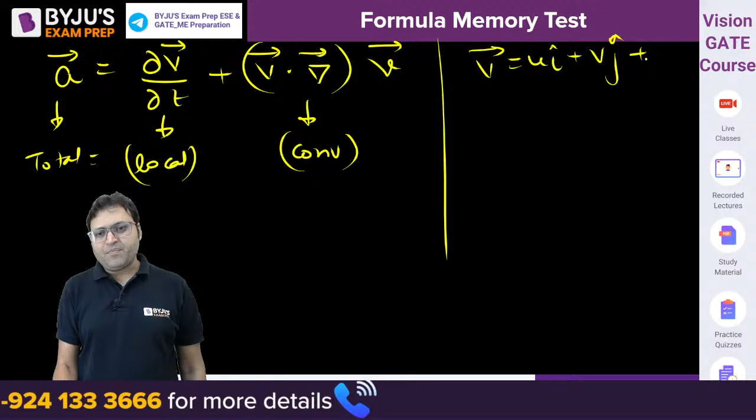What is V dot del? V dot del is not equal to del dot V. V dot del is u into del by del x plus v into del by del y plus w into del by del z. So this is the expression for acceleration. And del dot V will be del u by del x plus del v by del y plus del w by del z. There is a difference between del dot V and V dot del.

The next one. The next question, everyone, answer the next question.

For flow to be possible, velocity potential function satisfies Laplace equation. What is the Laplace equation? Del square phi is equal to 0. And for irrotational flow, the stream function satisfies the Laplace equation. So del square psi is equal to 0. Del square is equal to del dot del, that is del square by del x square plus del square by del y square plus del square by del z square. So both must be equal to 0.

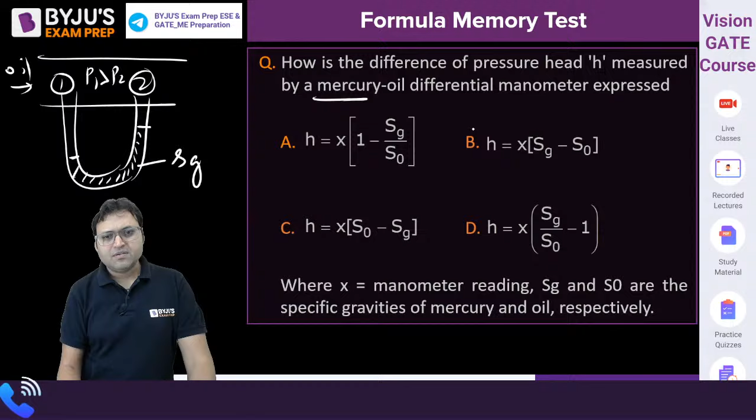What is the difference of pressure head? So, if we attach a manometer, if P1 is greater than P2, then the manometric deflection will be like this. This is the specific gravity of the manometric fluid, and the manometric fluid is mercury, and the flowing fluid is oil. So the pressure head is P1 minus P2 by rho g. How to denote P1 minus P2 by rho g? What will we get? We will get H is equal to X into Sg by S

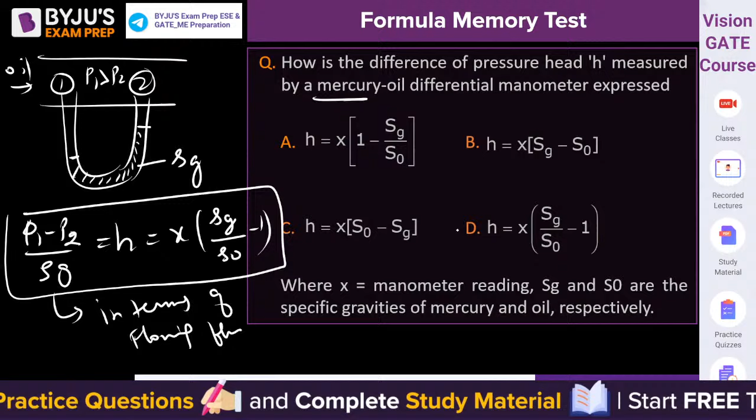of oil minus 1. That is the pressure head difference in terms of oil, in terms of the flowing fluid head. X is the manometric reading, Sg and So are the specific gravities of mercury and oil. What is the answer? D. D is the answer. What about the next?

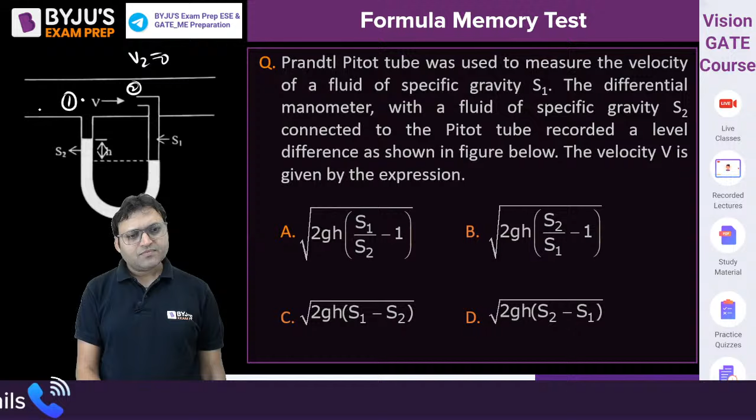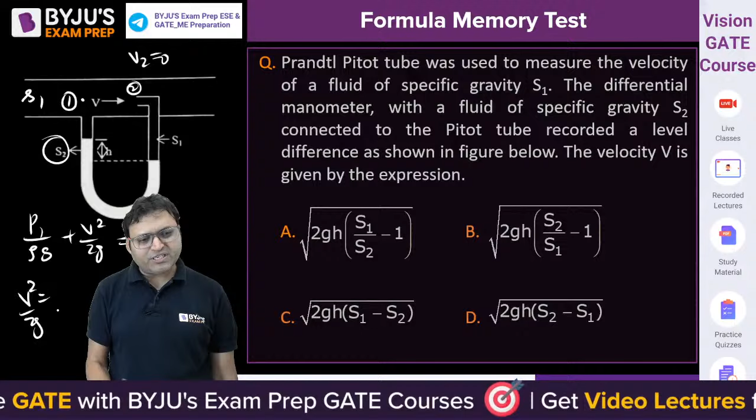The next one. Prandtl's pitot tube was used to measure the velocity of a fluid of specific gravity S1. Here is point 1, here is point 2. V2 is equal to 0, isn't it? And the fluid is S1 and the manometric fluid is S2. So if we apply the Bernoulli equation, P1 by rho g plus V square by 2g is equal to P2 by rho g. So V square by 2g is equal to P2 minus P1 by rho g.

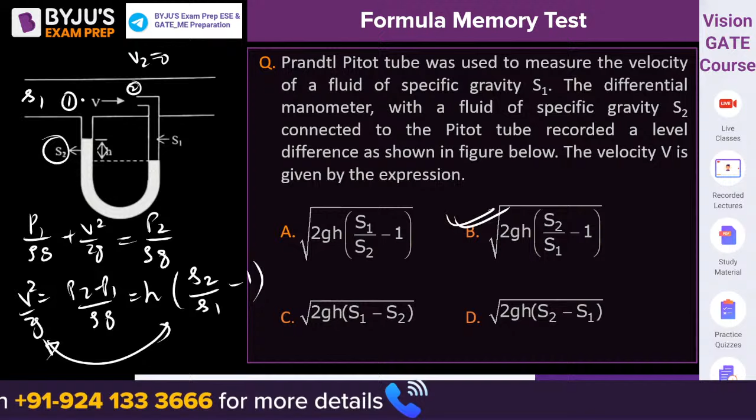And what is P2 minus P1 by rho g? If the manometric fluid deflection is H, it is H into S2 by S1 minus 1. So we can find out V from under root 2g times that. From here we can find out the velocity V. What is the correct answer? It will not be A, it will be B. B is the right answer. Right? B will be the correct answer.

Now let us move to the real flow. What we discussed so far are the questions from kinematics, as well as the questions from the Bernoulli equation. Now let us move to the next one. The transition from laminar to turbulent flow does not depend on... look, it is the Reynolds number, rho Vd by mu. It depends on density, yes. It depends on the diameter, and it depends on the velocity. It does not depend on the length. It is not a function of the length of the pipe.

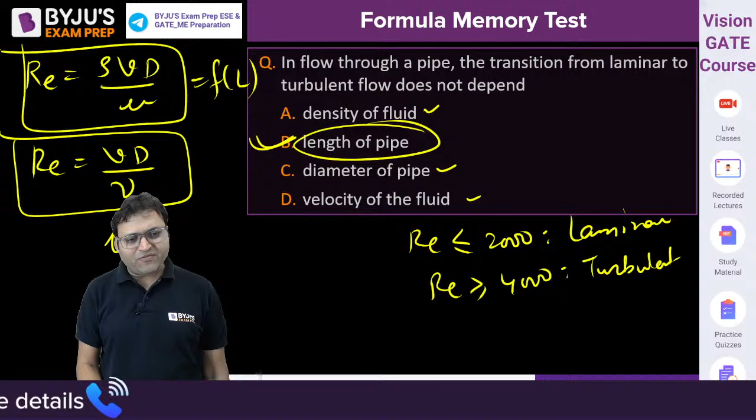For Reynolds number less than 2000, the flow in the pipe is laminar. For Reynolds number greater than 4000, the flow will become turbulent. It does not depend on the length. So Reynolds number can also be written as V into D by kinematic viscosity, where kinematic viscosity is equal to dynamic viscosity per unit density. As we discussed yesterday, the unit of kinematic viscosity is meter square per second.

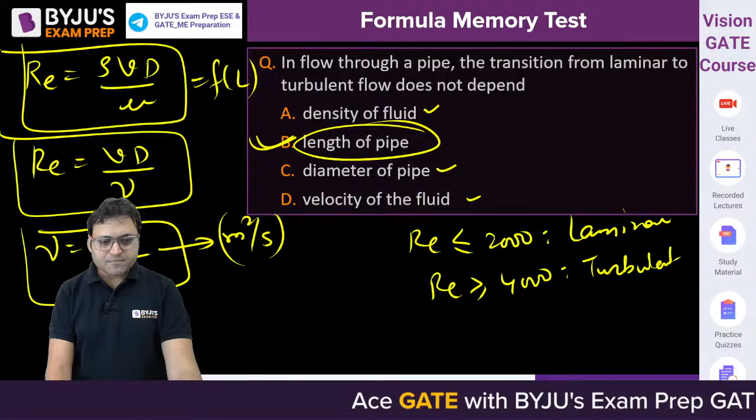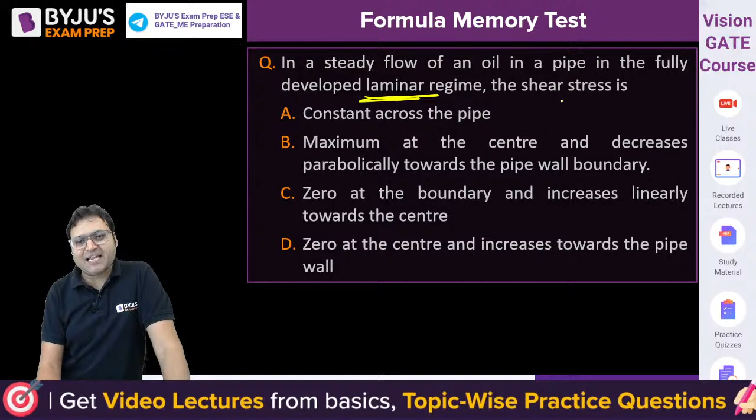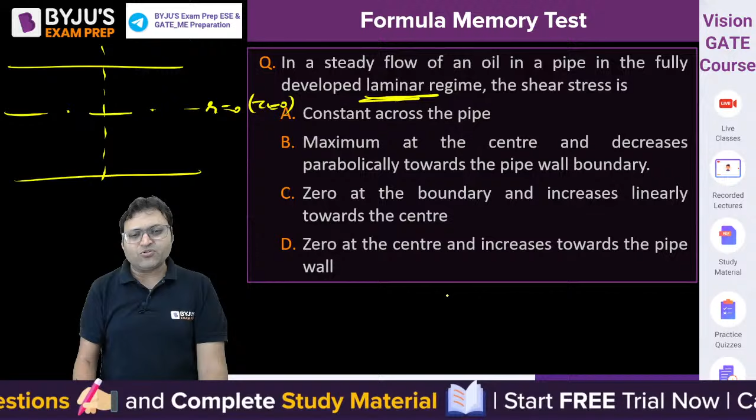In a steady flow of an oil in a pipe in the fully developed laminar regime, how does the shear stress vary at any section? At r is equal to 0, shear stress will be 0, because tau is given by minus dp by dx into r by 2, or 2 mu U maximum r by capital R square. So at r is equal to 0, tau is equal to 0, and the variation of shear stress is like this. This is tau naught at r is equal to capital R. At the wall of the pipe, shear stress is maximum.

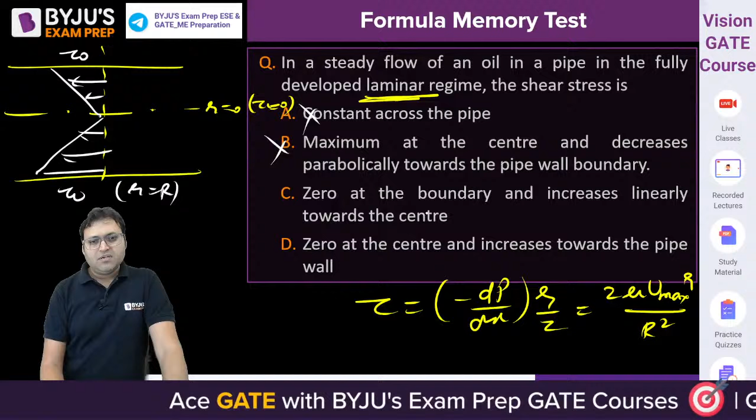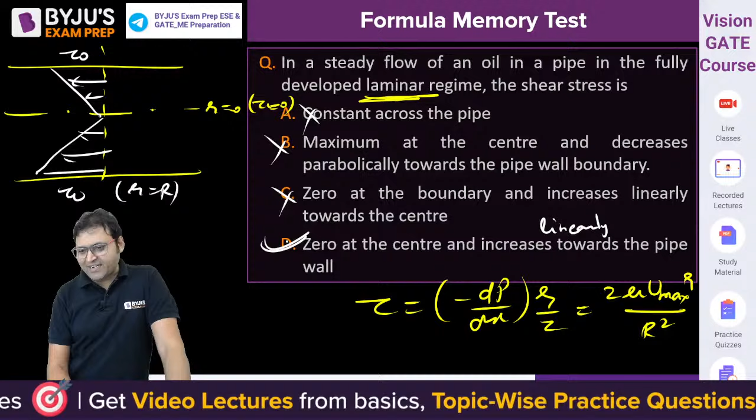Constant across the pipe? No, it is not constant. It is maximum at the center? No, it is 0 at the center. It's 0 at the boundary? No, it is 0 at the center. It is 0 at the center and increases linearly towards the pipe wall. D is the correct answer. Tau is a linear function of r. The variation of shear stress is linear in case of laminar flow through pipe. What about the next one? The next question.

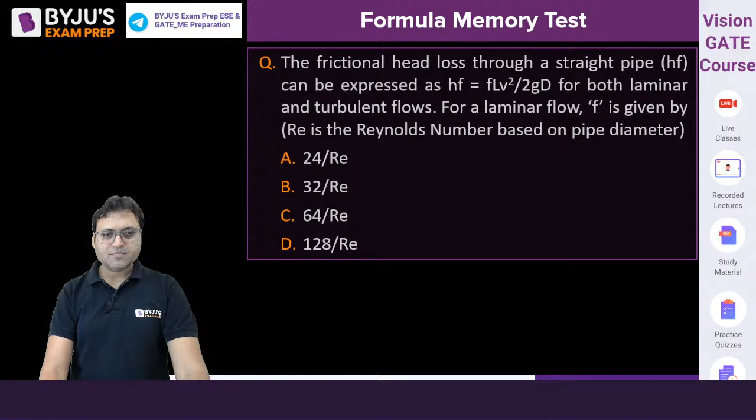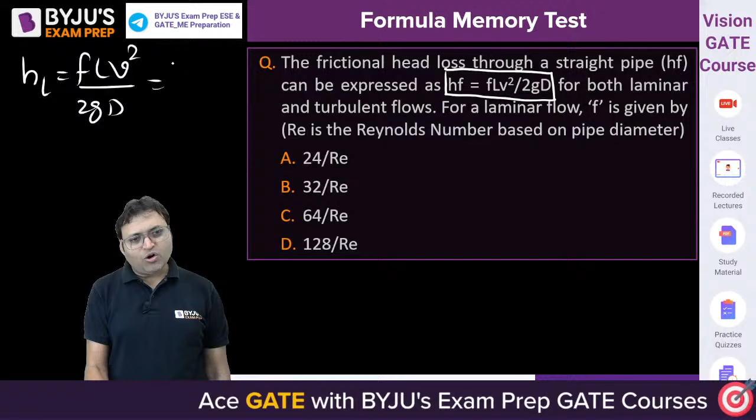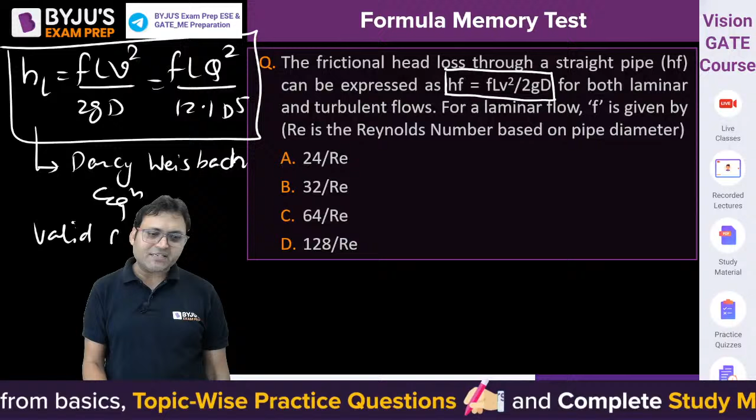The frictional head loss through a straight pipe can be expressed as, this is called the Darcy-Weisbach equation. hL is calculated as fLV square by 2gD, or we can write it as fLQ square upon 12.1 D to the power 5. This is the Darcy-Weisbach equation, which is valid for laminar as well as turbulent flow. Laminar plus turbulent flow.

So, if the flow is laminar, then f is given by 64 by Reynolds number, 64 by Re. Option C. C will be the right answer. Next one.

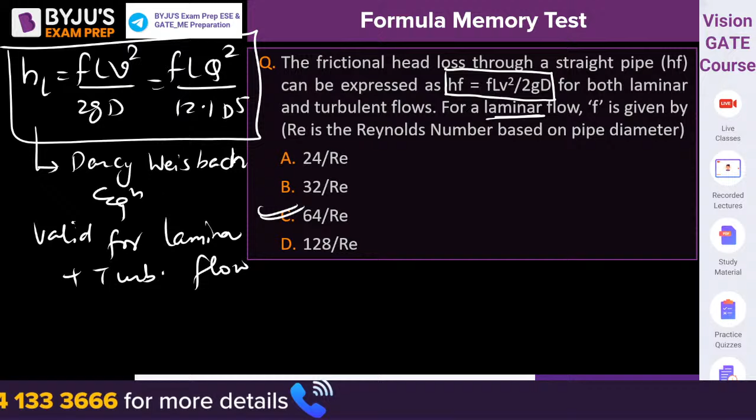Maximum to average velocity in laminar flow through a pipe: U maximum by V average is equal to 2 for laminar flow. And average velocity by maximum velocity will be 1 by 2. Do not commit this mistake. Maximum velocity is twice the average velocity.

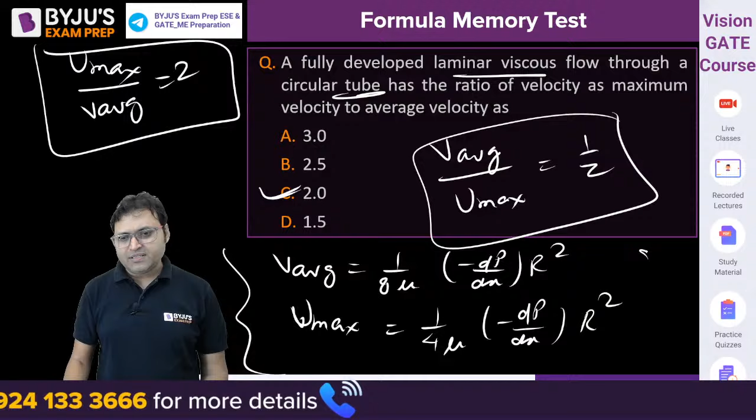Average velocity is 1 by 8 mu into minus dp by dx into R square, and maximum velocity is 1 by 4 mu into minus dp by dx into R square. These are the expressions of average and maximum velocity. C is the correct answer. Now for the parallel plates. For laminar flow between parallel plates separated by a distance h, the head loss varies.

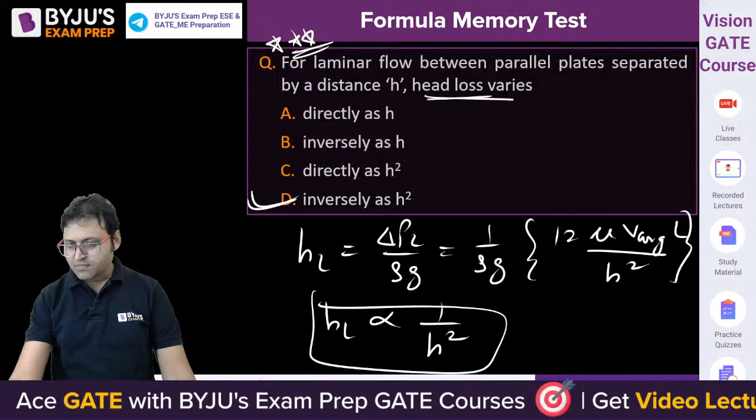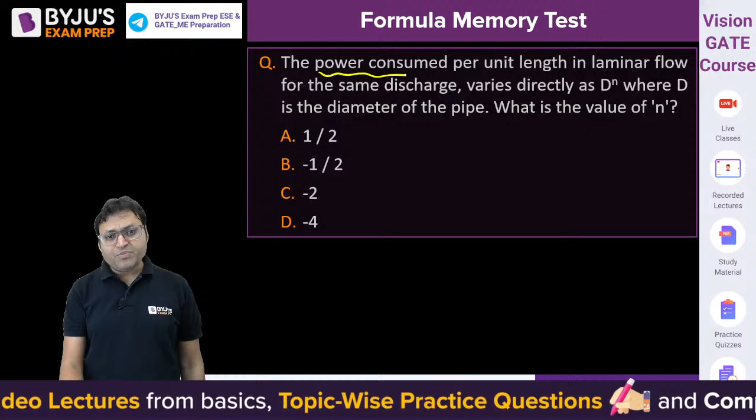Yeah. Next question. The power consumed means power loss. That is given by rho into Q into g into HL. And what is HL? HL can be written as delta PL by rho g. So the power loss is equal to Q into delta PL. And what is delta PL? The flow is laminar, so we can use the Hagen-Poiseuille equation.

So power loss is equal to Q into 32 mu V average L by D square. For the same discharge, if discharge is constant, then V is inversely proportional to D square. So power loss is proportional to V average by D square, and V average is inversely proportional to D square.

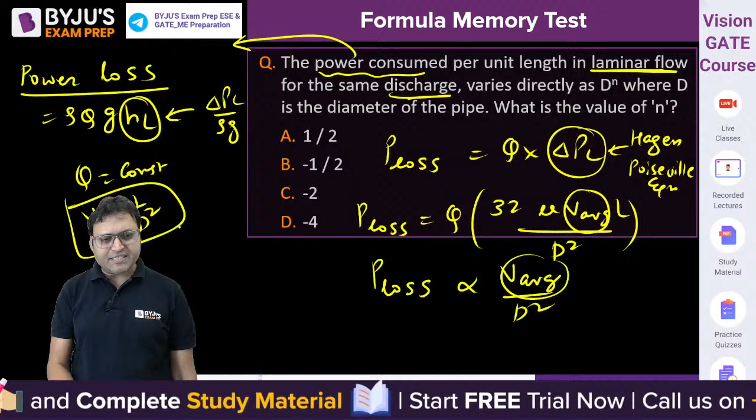So power loss is inversely proportional to D to the power 4. So it is proportional to D to the power minus 4. D is the correct answer.

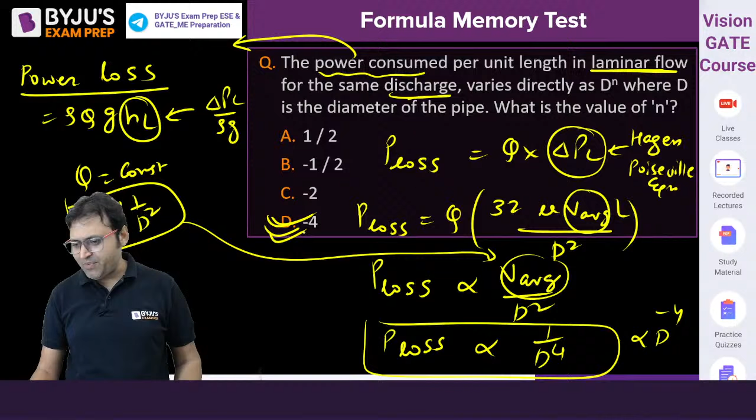So here power loss is proportional to f upon D to the power 5. If you put the value of f here, then power loss will be proportional to D upon D to the power 5. You will get the same result. Power loss is proportional to D to the power minus 4. Either use the Hagen-Poiseuille equation or the Darcy-Weisbach equation. That is your choice. The answer will be option D only. Very, very important question. Either numerical or theoretical question is asked from this.

The next one, from turbulent flow. In a fully developed turbulent flow through a rough pipe, how is the friction factor related to relative roughness and Reynolds number? For a smooth pipe, when the ratio of k by delta dash is less than 0.25, f is given by 0.316 upon Re to the power 1 by 4. It is a function of Reynolds number only, for the smooth pipe.

And if the pipe is rough, 1 by root f is equal to 2 log R by k plus 1.74. That is when k by delta dash is greater than 6. So f is a function of k by D, that is relative roughness. And if the pipe is in transition, then f is a function of Reynolds number as well as k by D ratio.

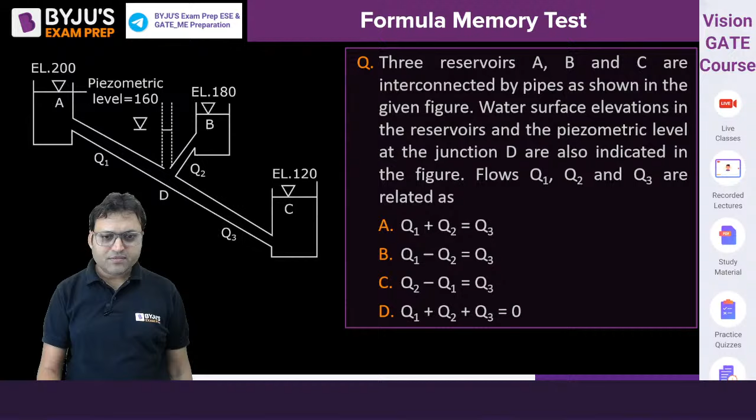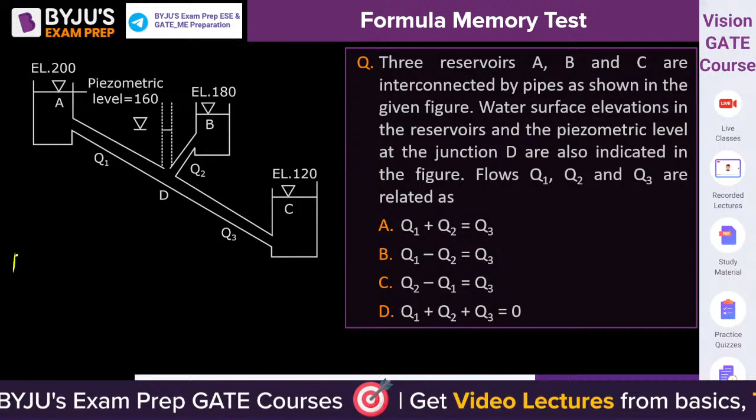What you need to understand here is flow always takes place in the direction of decreasing total energy of the fluid. At A, the energy level is 200. So HA is given as 200.

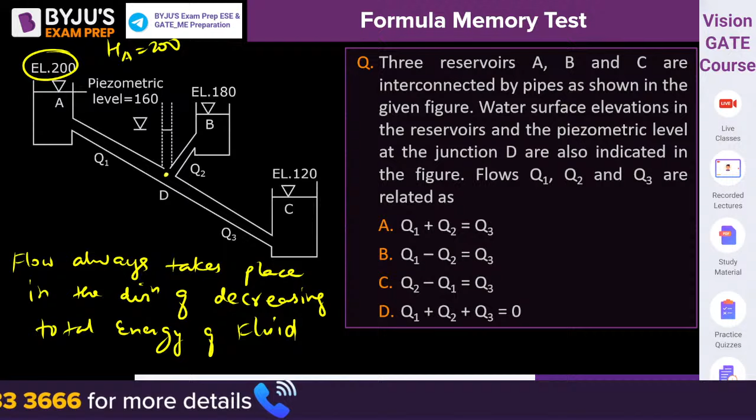At the junction D, the velocity is equal to 0, so the piezometric level, that is HD, is equal to 160. At B, HB is equal to 180, and at C it is equal to 120. So we can find out the direction of the flow.

D is having the less energy, so the flow is from A to D. And total energy at B is 180, total energy at D is 160. The flow will be from B to D. And D is having more energy than C. Then the flow will be like this. So it will be Q1 plus Q2 is equal to Q3.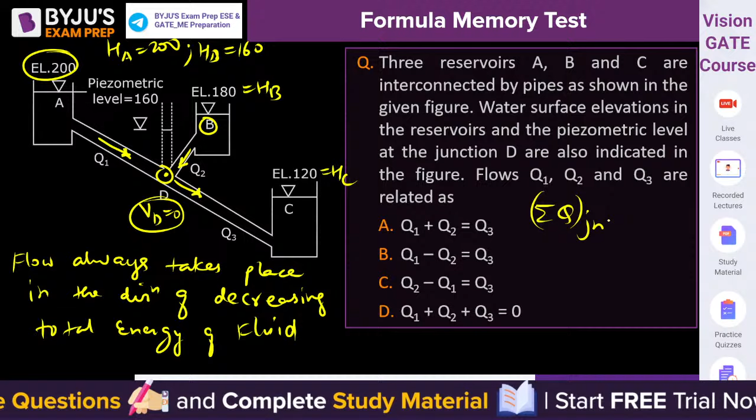Sigma Q at a junction is equal to 0. Or we can say sigma Q in is equal to sigma Q out. So entering will be Q1 plus Q2, leaving will be Q3. So A is the correct answer. Q1 plus Q2 is equal to Q3. The flow always takes place in the direction of decreasing total energy of the fluid, isn't it?

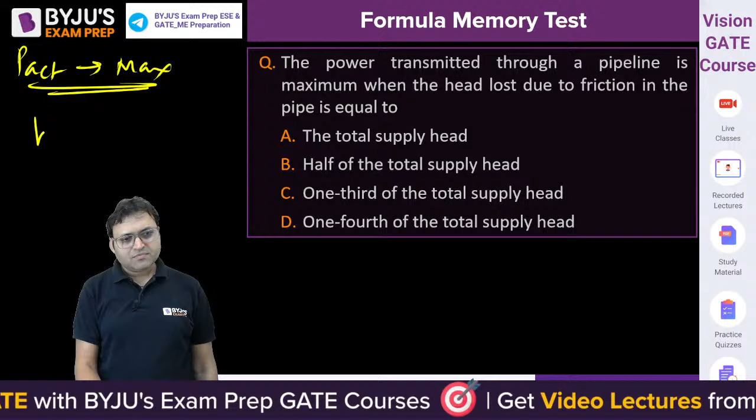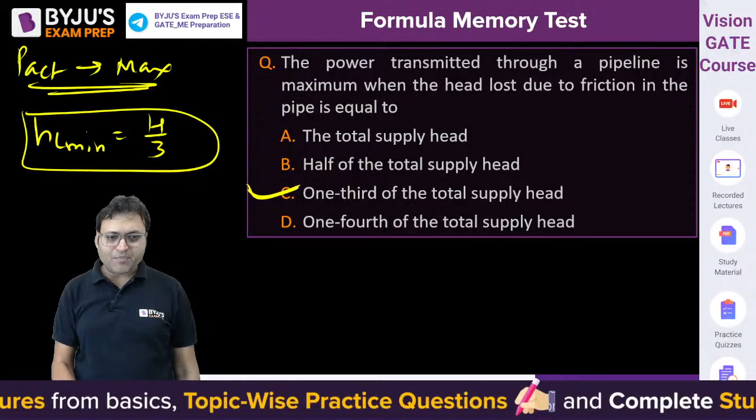And if we want the power to be maximum, P actual to be maximum, what will be the condition? HL should be equal to H by 3. For power transmission to be maximum, the loss should be H by 3. So it should be 1/3 of total supply head, C, and the maximum efficiency will be equal to 2 by 3 or 66.67%. If HL is equal to H by 3, then the efficiency will be maximum, that is 2 by 3 or 66.67.

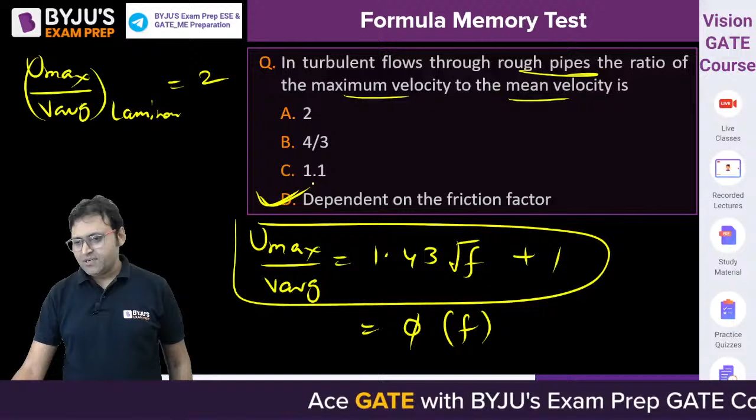Now, in turbulent flow through rough pipe, the ratio of maximum velocity to the mean velocity, U maximum by V average, is 1.43 under root of F plus 1. That is the ratio. It depends on friction factor. The ratio U maximum by V average for laminar flow is equal to 2. But for turbulent flow, it depends on friction factor, D. D will be the answer.

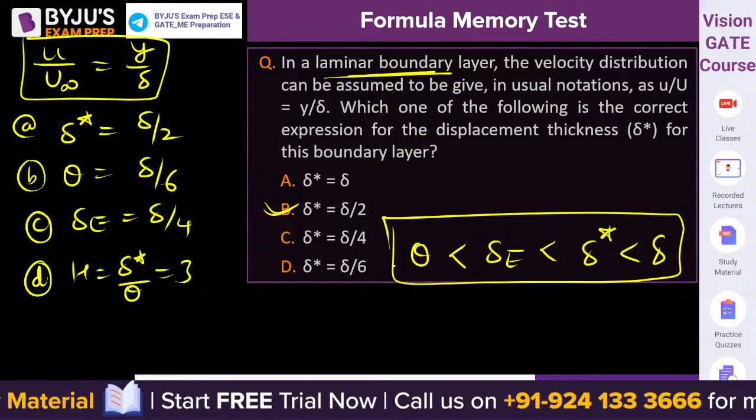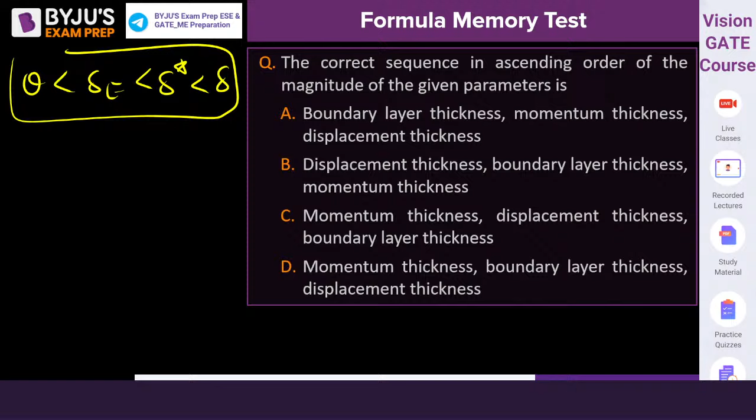Delta star is delta by 2, and if we find out the increasing order, theta is minimum, then delta E, then delta star, then delta. Isn't it? The correct sequence, I told you, theta, then delta E, then delta star, then delta. This is the ascending order of the magnitude. Displacement thickness, momentum thickness, energy thickness is not given.

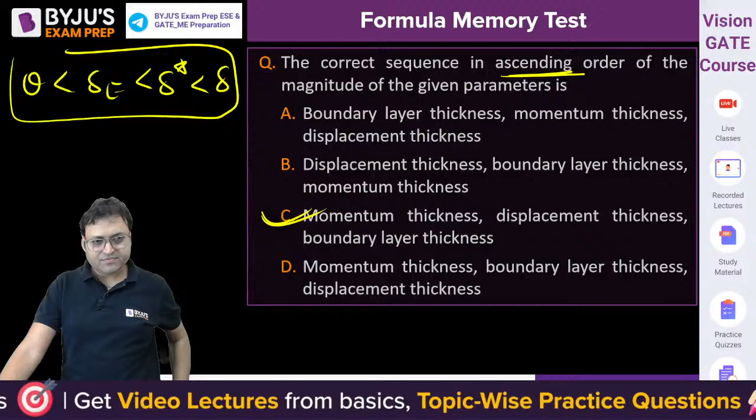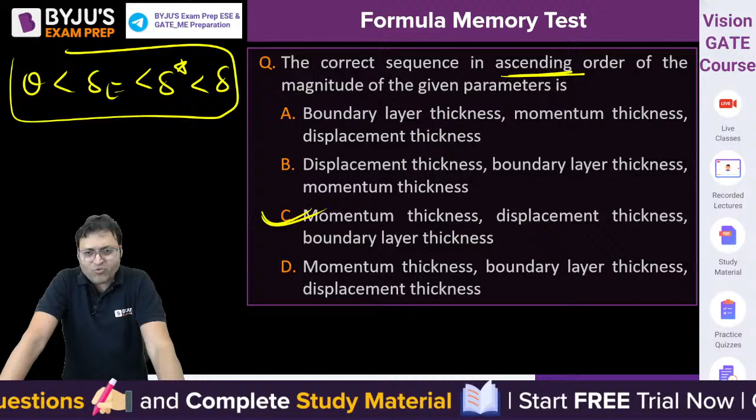What is the correct answer for this one? Isn't it option C? In the ascending order, increasing order, isn't it C? Momentum thickness is minimum, then energy thickness, then displacement thickness, and then boundary layer thickness. C is the answer. C होगा ना, ascending order.

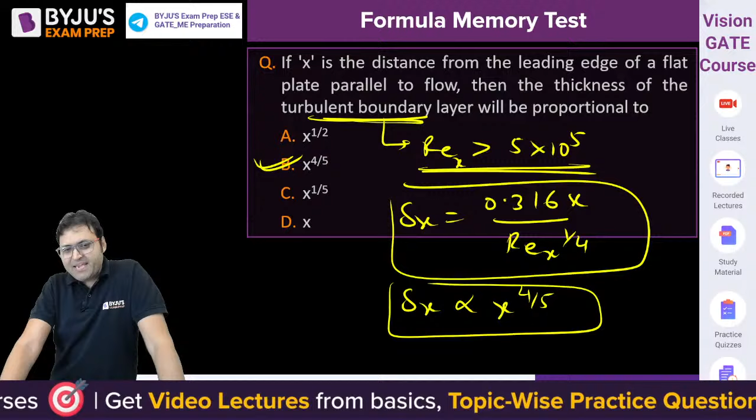It is for turbulent boundary layer. Do you know the relation? For turbulent boundary layer, when the Reynolds number is greater than 5 into 10 to the power 5, delta x is equal to 0.316 x upon Re x to the power 1 by 4. That is the expression. So delta x is directly proportional to x to the power 4 by 5. टर्बुलेंट की बात हो रही है मोहित, x to the power 4 by 5. B, isn't it? B is the answer.

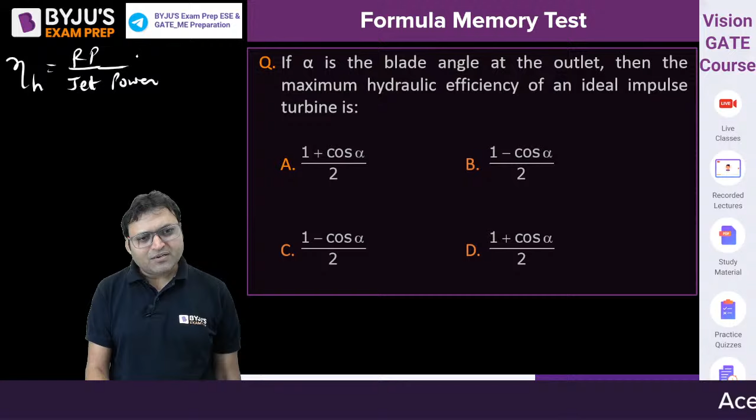And efficiency, what is hydraulic efficiency? That is the ratio of runner power by jet power. So runner power is m dot into u into v1 minus u into 1 plus cos beta 2, or cos alpha, upon half into m dot into v1 square. So the hydraulic efficiency is equal to 2u into v1 minus u into 1 plus cos beta 2 upon v1 square.

If you put u is equal to v1 by 2, maximum hydraulic efficiency will be equal to 1 plus cos beta 2 by 2. It is greater than 50%. Maximum hydraulic efficiency is greater than 50%. 1 plus cos alpha by 2. Alpha is the blade angle at outlet, that we call beta 2. So 1 plus cos alpha by 2. A is the answer.

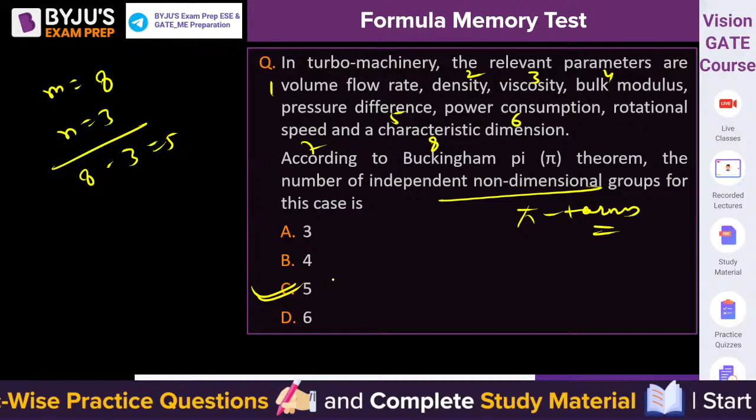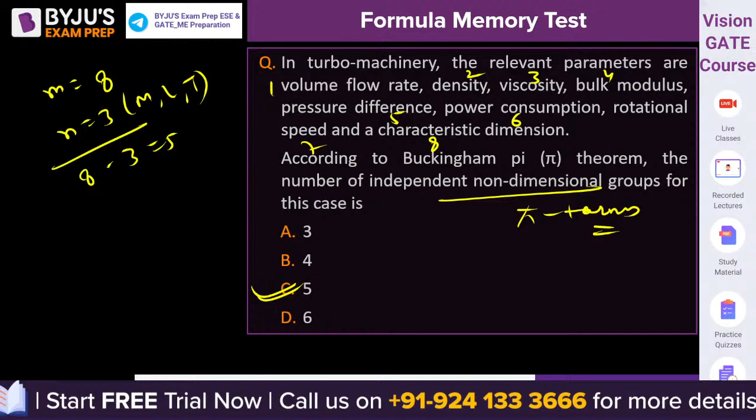N is MLT, fundamental dimensions are MLT. So let us stop here only. If n variables in a physical phenomenon contain m fundamental dimensions, then the variables can be arranged into n minus m dimensionless terms.

Right? So that is all from my side for the day. I hope you enjoyed. There are some more questions, but that you can do on your own.